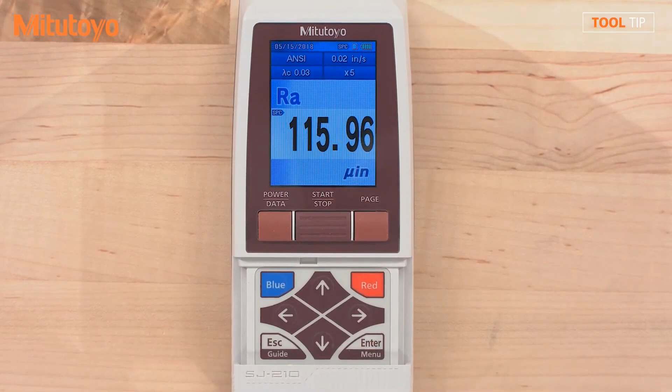Remove the panel that covers the I/O ports on the SJ210. Insert the card into the micro SD port. If you'd like, you can replace the cover. Press the power button and slide down the key guard to access the settings buttons. Press the Enter key to go into the main menu.

Scroll down using the down arrow and select Set Environment followed by the Enter key. Again, scroll down and select the memory card option followed by the Enter key. The SJ210 recognizes that a memory card was inserted and that it has not yet been formatted. Press the Enter key and the Enter key one more time to begin formatting the SD card. Once complete, you'll see now that our memory card is formatted. Press Home to leave this menu.

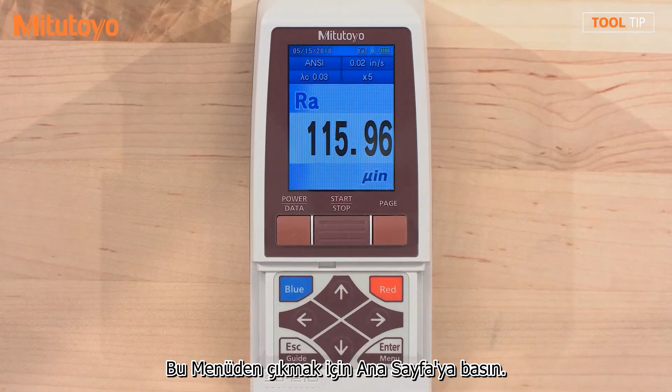Press the menu button to re-enter the main menu. Enter again to select Set Environment. Scroll up until Data Output is selected and press Enter. Scroll down to select Hard Copy. Press Enter again. Press the blue button to return to the home screen.

To export the current screen, press the Data button. To change what is displayed on the screen, press the Page button, and again the Data button if you wish to export that screen as well. Now that we're finished exporting, I'll show you how to retrieve the data on the computer.

Remove the cover, and then remove the SD card from the unit. There are many ways to read an SD card into a computer. I'm going to use an off-the-shelf card reader. Next, I'll plug the card reader into an available USB port on my laptop. Once the card is inserted, the Windows Explorer automatically launches on my laptop.

The folders listed were created when we formatted the SD card in the SJ unit. To access your saved images, open the Image folder. Every image that you have saved will be in this folder. Select a file to view the image.

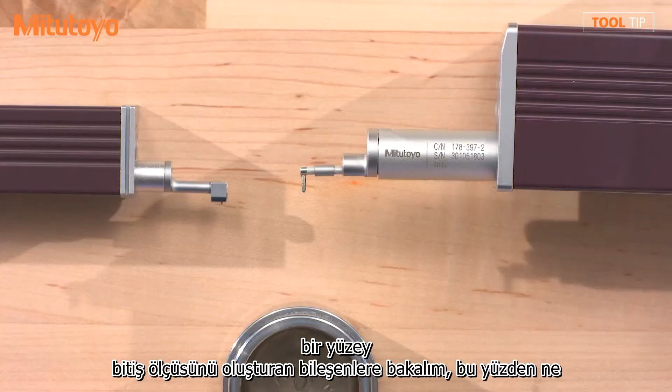Okay. So Drew, what equipment do we have here right now? So I have two units. I have a skidded and a skidless system. These are both made by Mitutoyo, but these could be, in effect, any brand of surface finish measuring system. All systems are made up of the same components.

You have a stylus, and the stylus is the piece that contacts the surface to do the measurement. The stylus feeds into a detector. The detector takes the movement, translates it into a signal that can be measured, and then we have the drive unit, which pulls the stylus and detector assembly back and forth for the measurements. That'll plug into an amplifier, which is where you get your readings from.

Now, this is a skidless system, as I mentioned. The skidded system is very similar, except you'll notice that the stylus and the detector are all one piece here. So I still have the stylus that's protruding out from the detector, but around it is a housing, and that housing is what we refer to as the skid, right here.

So what's the purpose of the skid, Drew? The skid is going to act as a mechanical datum for your surface that you're measuring. On a skidless system, that datum is actually inside the drive unit. So you're going to find that most entry-level systems are going to be the skidded unit with the housing around the stylus. So Drew, now that I understand the physical differences between the devices, what are some differences in application?

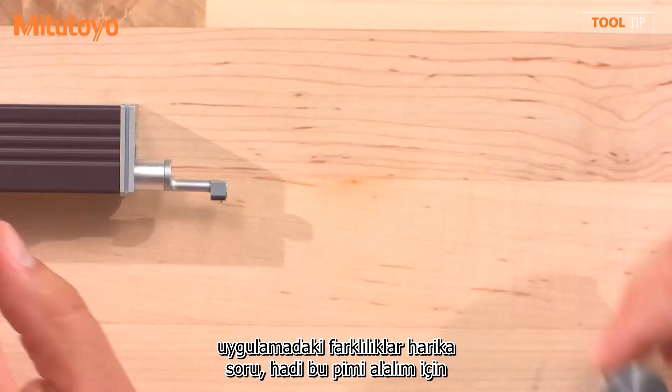Great question. So let's take this pin, for example. It doesn't have to be a pin, it could be any customer application, but it's a piece that somebody needs to measure surface finish on. As I'm looking at this pin, there's really multiple areas that can be measured. We can measure the top face, we can measure along the axis of the pin, we can measure over the radius. And that's really going to make a difference which unit we use based off what needs to be measured on here. Okay, well, let's just say I wanted to measure along the axis.

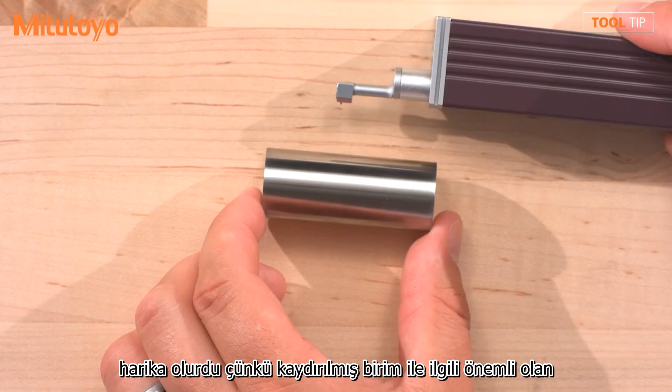Okay, so if you're measuring along the axis, a skidded unit would be great, because what's important with the skidded unit is that after it makes contact with the part, the skid is always in complete contact with the surface that's being measured. So if you look at the skid here, there's no gaps between the skid and the part anywhere. It's not sitting at a weird angle to where the beginning or the end of the skid is off. It's nice, even contact, to where if I were to move the stylus or the skid back and forth, it's always in contact with the part.

And that's important because the skid is the datum, and if the datum isn't making good contact with the part, you get inaccurate measurements, right? That is correct. So if you were to measure along the axis of this part, you'd be fine. If you wanted to measure the top face of this part, you'd be fine as well. Now what if I wanted to measure radially? That would be an issue with the skidded system.

So let's flip the part up here. Now if I were to present the stylus to the area, as I move the stylus back and forth across the part, you notice depending on where I am, either the beginning or the end of the skid are going to be off of the surface that's being measured, right? I'm either going to have a gap at the beginning or gap at the end of the measurement. Right, and this would be bad because that's the datum and it's not making consistent contact with the part.

That's correct. Now, if I were to take a measurement with this, I could probably spend some time with the setup and actually get a number that's going to show up on my amplifier, but that doesn't mean that the number is a good measurement that I can trust. Okay, so in an application like this, a skidless system would be better?

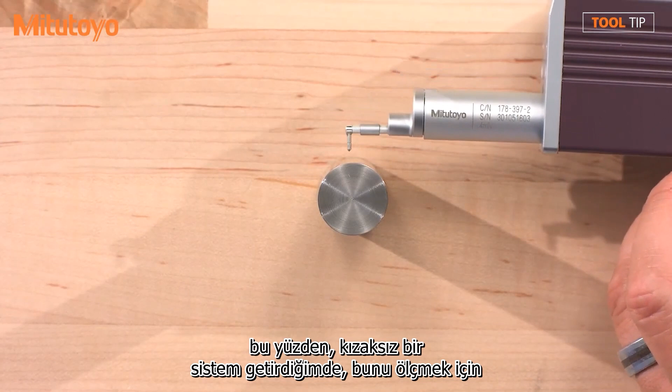That's correct. So you'll notice as I bring a skidless system in for measuring, that by not having a skid, I can actually bring the stylus in contact with the surface. I'm going to get a very good measurement here. You're going to be able to trust these numbers that you're getting from this unit. So as long as I stay within the stroke of the detector? That's correct. Depending on the unit you have, that will vary how much actual stylus travel you have.

So as long as I stay within my stylus travel, I can measure radially across the part? That's correct. That would be no issue to actually have the stylus traverse from side to side. Obviously, I'm moving the whole drive unit here, but in an actual measurement process, it would just be the detector moving the stylus. Well, Drew, that makes sense, measuring round parts versus straight parts. Are there any other features that would lend themselves to a skidless device versus a skidded? Absolutely. So let's switch parts for a second.

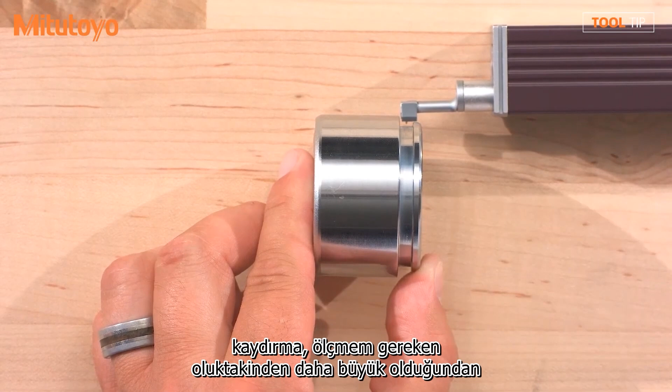And now we're going to take a look at a piston. Notice the piston has a small groove here on the outside diameter. If we wanted to measure this groove, it might be a little difficult to do with a skidded system because as I start to move my stylus in, you notice the skid is larger than the groove that I need to measure. So I could not actually measure the bottom surface of this groove with a skidded unit. However, if I bring my skidless system in, now you'll notice I can easily not only reach the groove that needs to be measured, but I still have room to measure from side to side along that groove.

So let's say that I have a part with a groove that's a little deeper, or maybe it's a little more narrow. Is there some flexibility in the type of styli that I can use? Absolutely. With both the skidded and the skidless systems, there are different styli that can be used with that system. So if you need to reach deeper within a part or down within a groove, maybe at a little bit of an angle for a gear tooth, we can accommodate for that. There are more styli options available for skidless systems than there are for skidded systems typically though.

Okay. So other than the physical limitations of the workpiece, is there any other reason that you would use a skidded versus a skidless device? It's going to come down to what parameters you're measuring. And when I say parameter, most folks are familiar with terms like Ra, Rq, Rz. Those are the parameters that you're actually measuring with the surface finish gauge. Because it starts with the R, it's a roughness parameter. Any gauge, whether it's skidded or skidless, can measure the roughness parameters.

If your parameter starts with a W, it's a waviness parameter. We can't actually measure waviness parameters with a skidded unit because the skid itself will mechanically filter out the waveform. So if we're going to look at waviness, Wa, Wt, are common parameters, we have to start with a skidless system for those measurements. Okay, great.

So Drew, I got to ask, if the skidless system seems a little more versatile, why would someone purchase a skidded system? Typically, your skidded systems are going to be your entry-level systems. They're going to have a lower price point on the initial system itself. Once you get into the skidless system though, you'll find that the replacement styli are going to be less money than a skidded system because on a skidless, the stylus is a standalone, whereas on a skidded, the stylus and the detector are both one body, one housing.

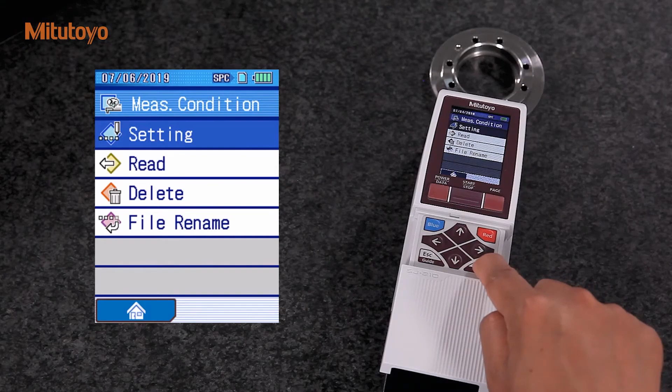We start by pressing the menu button. Now, I select measurement condition and then setting. First, we define the standard. Mitutoyo Surftest SJ210 supports various industrial standards. For this measurement, we select an ISO standard. Now, we choose the required profile. We will measure surface roughness, so we select R profile.

Then we define the roughness parameters. Surftest SJ210 supports various roughness parameters. We use the Gauss filter for this measurement. Lambda C is the filter setting. This is one of the most important settings for roughness measurements. The selection of filter we apply depends upon the tolerance mentioned in the technical drawing. ISO 4288 provides us with the guideline for selecting the required filter. In this case, I will use 0.25.

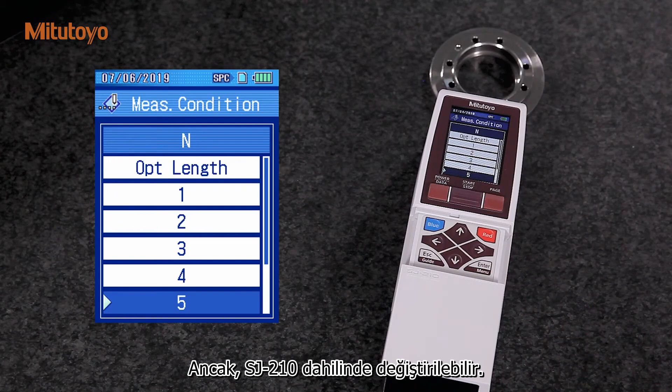The SJ210 automatically chooses lambda S according to our selected lambda C. N is the number of our sampling lengths. According to the ISO standard, 5 is the default. However, it can be changed in the SJ210. Pre-post travel of the detector during the measurement can be switched on or off. If necessary, we can change the measuring speed. Also possible is a change of measuring range according to the measurement position.

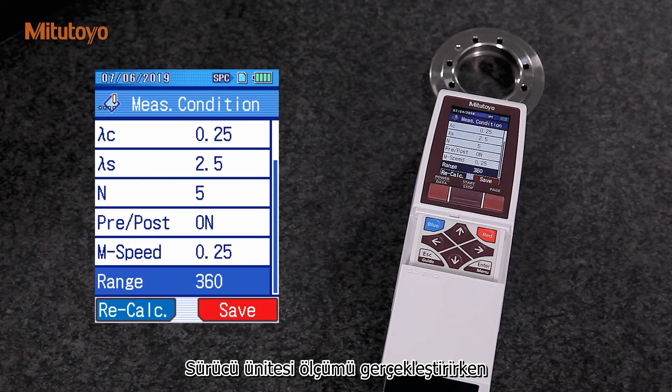Now, we have finished all the settings for our measurement. Next, we press the Start button. The drive unit conducts the measurement and the LCD shows the measured profile.

By pressing the page button, we can switch to other pages of the screen. We can check the roughness profile and other detailed information by pressing the page button. For the next measurement, the device remembers the setting, so it is not necessary to redo this process.

As you have seen, taking roughness measurement with Mitutoyo Surftest SJ-210 is a quick and easy task.

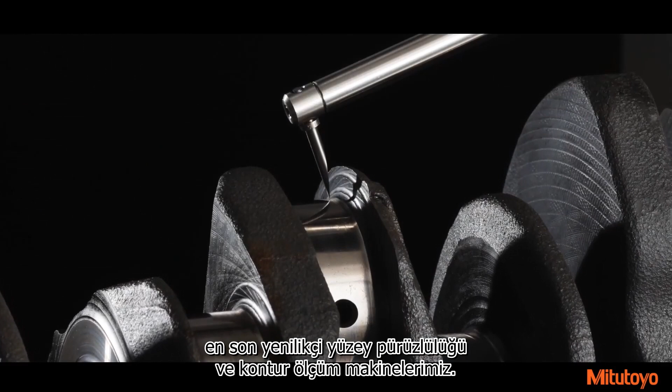Mitutoyo America Corporation is excited to introduce the Enhanced Form Tracer Avant series, our latest innovative surface roughness and contour measurement machines. New features offer time-saving benefits for the end user. The most significant enhancement to the Avant is the redesigned hot swapping method for changing surface and contour detector heads. This feature improves the process of exchanging detectors between surface roughness and contour measurement.

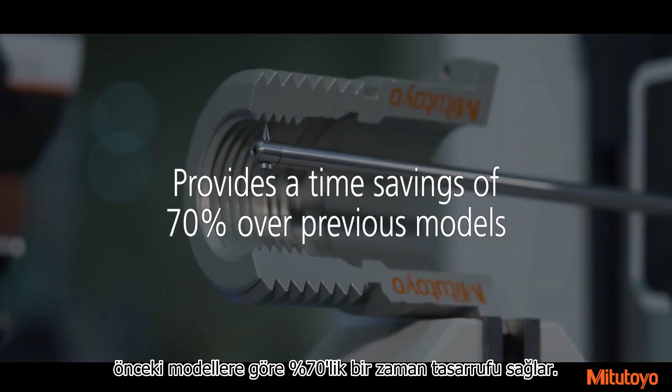This process eliminates the need for tools and powering off the control unit to exchange detectors, providing a time savings of 70% over previous models. The exchanged detector is also recognized by the software seamlessly. The C4500 detector offers a new stylus protection function, which controls the downward movement of a stylus. Utilizing the current Mitutoyo FORMTRACEPAK software, the downward motion is slowed, so the stylus can be detected when dropping off an edge during measurement. This reduces the risk of damaging the stylus tip.

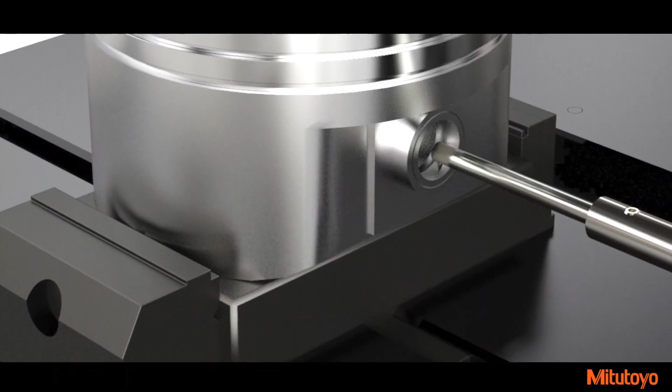The retraction speed of the stylus arm on the enhanced Avant series machines is 58% faster, dropping retraction times from 12 seconds to 7 seconds over previous models. This greatly reduces setup time and increases overall productivity. Another feature is the addition of operation keys to the remote joystick box.

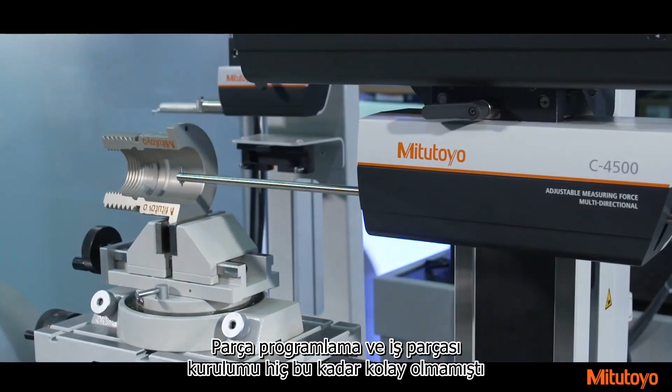Parts programming and workpiece setup has never been easier, since the machine can move into position without looking away from the part. The surface roughness detector allows you to position the detector to measure by simply pressing the Auto Set key. An operation key for changing the stylus direction on the contour detector has been added for quick and easy access. On previous models, this was performed only through the software.

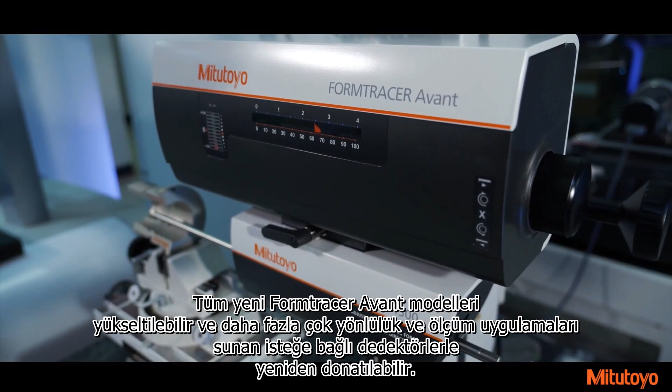All new Form Tracer Avant models can be upgraded and retrofitted with optional detectors, which offer more versatility in measuring applications. These options include adding a contour measuring detector on standard surface roughness models, adding a surface roughness detector on standard contour measuring models, and adding other optional roughness detector holders for orientation on standard roughness models.

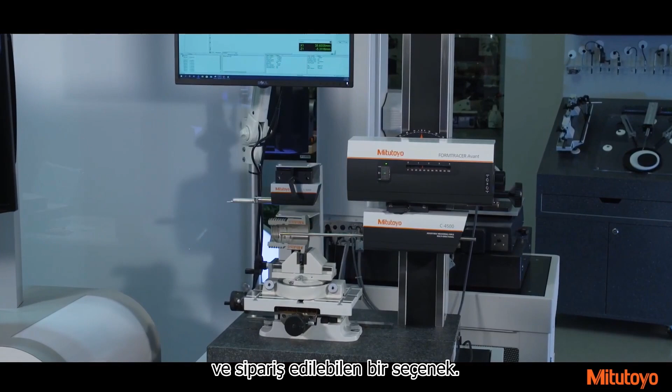The new design of the Form Tracer Avant also provides unification of the overall Mitutoyo brand and offers an optional redesigned space-saving air isolation machine stand. The new stand incorporates a concise all-in-one setup for the monitor, control unit, and CPU, and is an option which is available to order. The Enhanced Form Tracer Avant Series surface roughness and contour measurement machines are designed for today's smart factory with faster throughput, precise accuracy, and advanced information and production management.

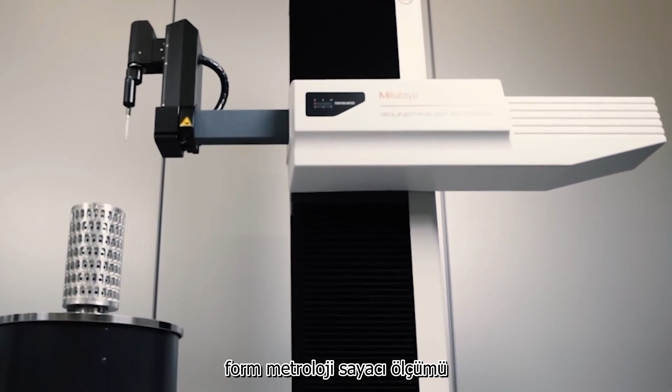My name is Oliver Senftem and I am a product manager at Mitutoyo Europe responsible for form measuring devices. In this video, I would like to introduce you to a great new Mitutoyo measuring device, the Roundtracer Extreme, which combines 3 conventional instruments into one single form measuring device. By integrating the measuring functions of form metrology, contour measurement and surface roughness analysis, this machine really lives up to the name Extreme.

To ensure you can work as accurately as possible, the workpiece must be aligned at the start of each measurement by the Roundtracer's fully automatic and motorized centering and leveling function. For this, we are creating a workpiece axis by measuring, for example, 2 rotational profiles. The new centering table architecture reduces position and axis deviations of the object to be measured and brings its workpiece axis perfectly coaxial to the rotary table axis. Thus, the table rotational accuracy of 0.02 micron can be utilized completely. And of course, this process is entirely automatic.

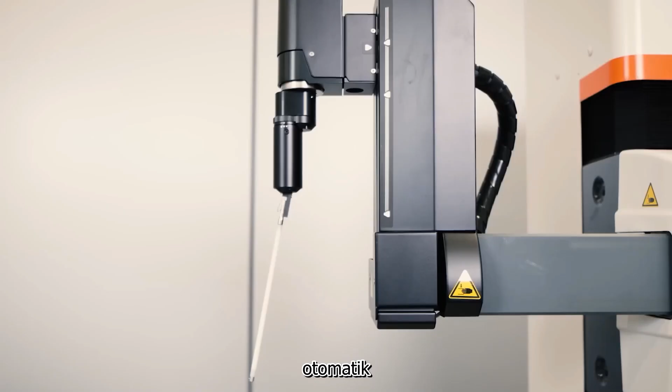After the centering and leveling process, we can start GD&T measurements and analyses such as roundness, straightness, cylindricity, run-out, perpendicularity, just to name a handful.

And of course, workpiece geometries can be completely different. For instance, measuring deep inside a thick-walled workpiece can be done with a newly developed 3-position motorized sliding axis on the detector holder. This helps avoid workpiece collision while enabling continuous automatic measurement.

While conventional measuring devices wait for the 0 degrees table position to start collecting data, the Round Tracer Extreme can start collecting data at any angle. And in combination with the increased drive speed of 100 mm per second in X and Z, this means considerable improvements for both time and throughput.

As a side effect of this high positioning quality of the table, which shows no significant erratic behavior, the analysis from our M-Cube Map software even allows the measurement and analysis of lead twist parameters. These are important to ensure leak tightness between the shaft and its sealing ring in the automotive industry.

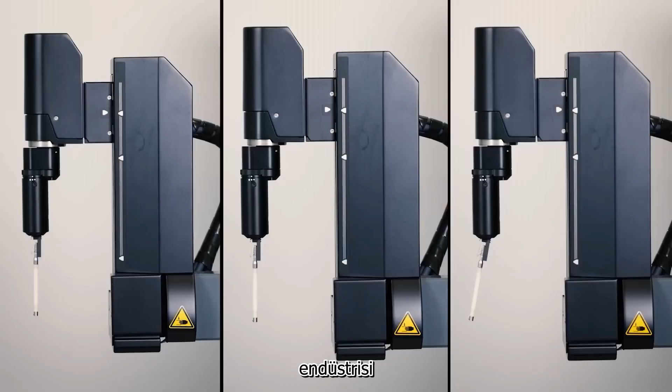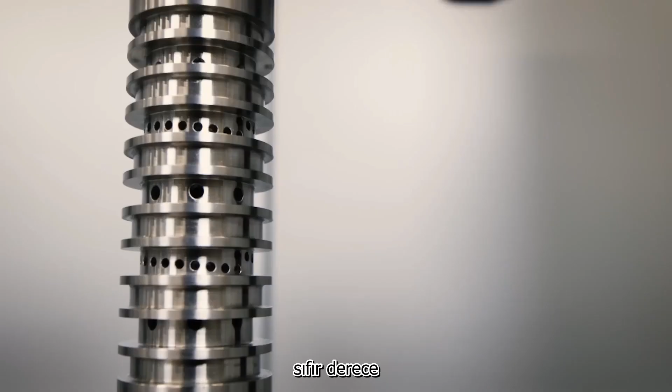In addition to the mentioned 3-position motorized sliding axis on the detector holder, the particular CNC detector unit offers enormous flexibility and can be rotated fully automatically in the desired measuring direction. Mitutoyo has added a huge number of styli that fit almost every requirement, such as small inside bores combined with an accurate straight stylus tip position of 0 degrees, or inside grooves with a cranked stylus, and many more.

As mentioned at the beginning, the Round Tracer Extreme can do much more than a conventional form measuring device. Just by using the contour stylus, the high-precision tracking contour measurement can be performed in the X or Z direction, including the necessary stylus tip radius correction. The geometric contour analysis can be carried out in combination with our extremely capable FORMTRACEPAK software.

In addition, low-noise roughness measurements equivalent to a conventional roughness measurement system are possible with the Round Tracer Extreme by using the surface roughness detector. The surface roughness measurement can also be done in Z and X direction and even when rotating. The famous manufacturer of surface roughness testers Mitutoyo has a huge number of existing roughness detecting styli from the Surftest series that can be used with the Round Tracer Extreme.

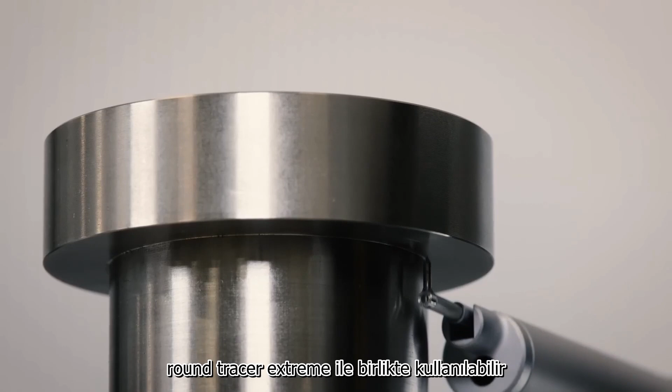So, the new Mitutoyo Round Tracer Extreme combines several device functionalities such as GD&T, contour, surface roughness measurement and lead twist analysis in just one device. And all of this with the highest level of accuracy, reproducibility and repeatability of measurement results. It truly is a quality assurance game changer.

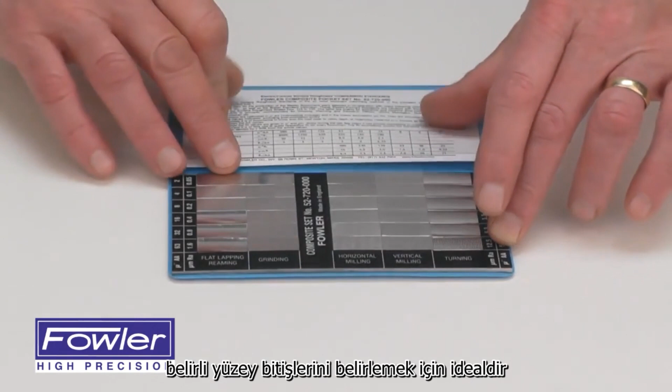The Fowler Surface Roughness Standard, part number 52-720-000, ideal for checking and identifying specific surface finishes. This one contains 30 different specimens, some for flat lapping, reaming, grinding, horizontal milling, vertical milling, and turning. Parts can easily be compared using a loupe or the fingernail scratch test.